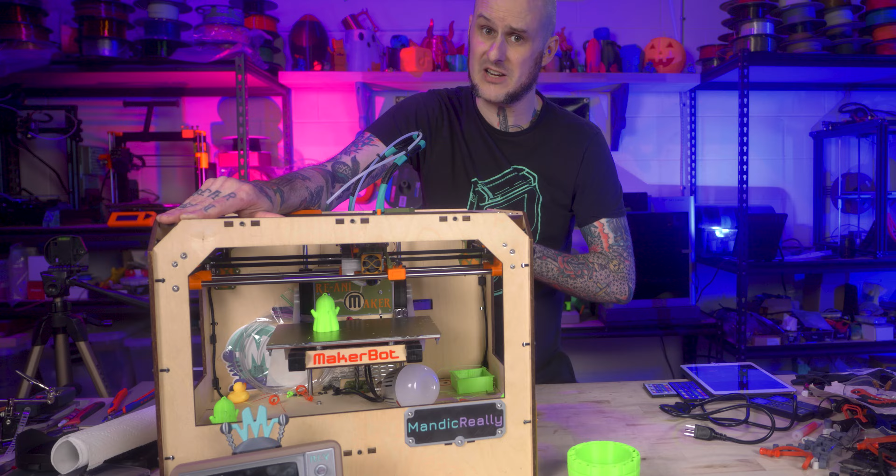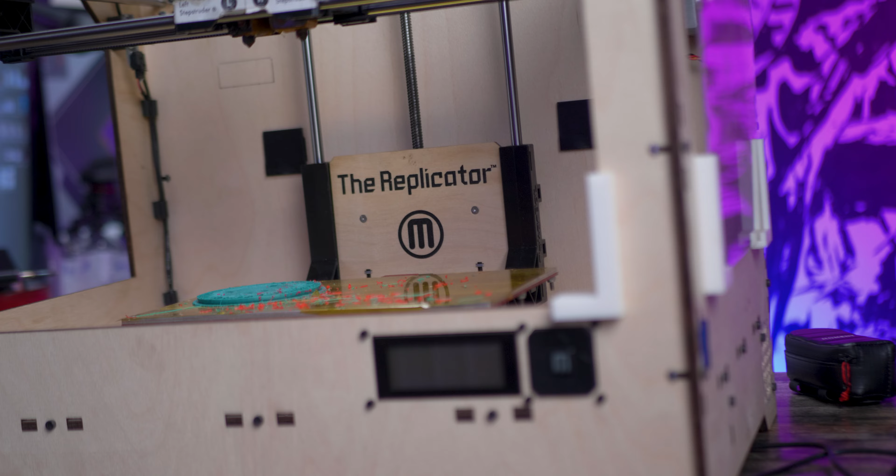For anybody who's unfamiliar, this original MakerBot Replicator came as a kit that cost about $2,000 US, and yes, the wooden frame is how it came. This particular one was a dual extrusion model with 2 extruders mounted on the carriage that I picked up off of Facebook some years ago.

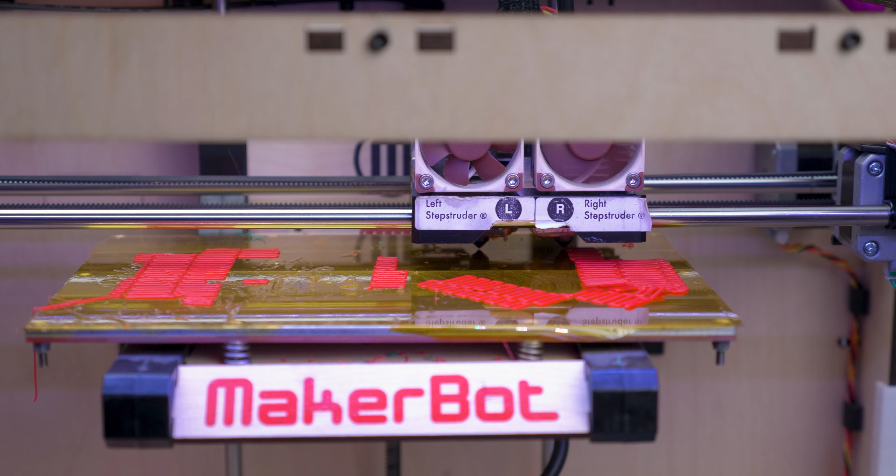Got terrible print quality out of it. One of the extruders wasn't acting properly, it had some shorted wires, and I put it on the shelf and never really did much with it until it came time to build this.

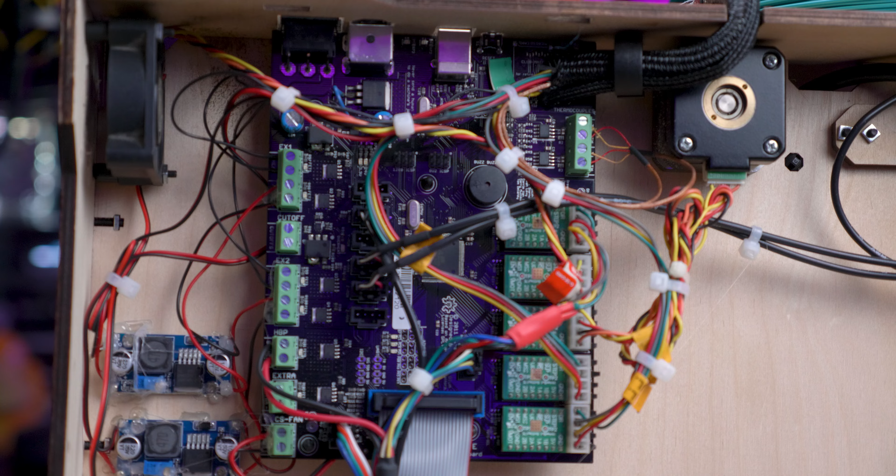My original intention for this machine was to upgrade the mainboard, install an E3D V6 and some part cooling that I designed for it myself, and make it my fastest 3D printer. At the time, I only owned a couple of Ender 3s and my Ender 5 Plus, so calling it the fastest 3D printer I had would not have been a very high bar to clear.

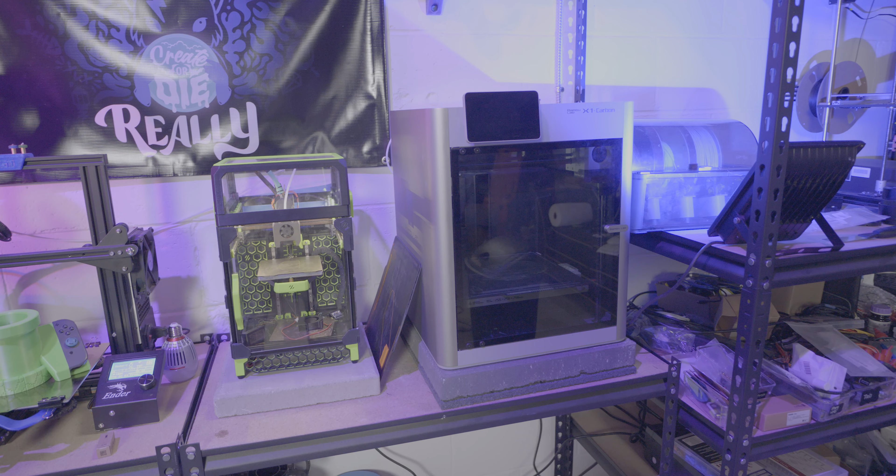With the experience I have from newer and faster machines, and all the builds I've done since I picked this thing up, it had to change and it had to be something different. So let's break down the parts that are at play here, and then we'll talk about the actual design intricacies of this machine.

Let's start off with the thing I mentioned in the intro skit, the Drop Effect XG Extreme Gradient Hotend. Quick note, this is not a review of the XG, and it is not sponsored by Drop Effect. They did send me this hotend pre-release. I had a machine it was going to fit in really nicely, so I used it, and I think it's neat, so let's discuss it.

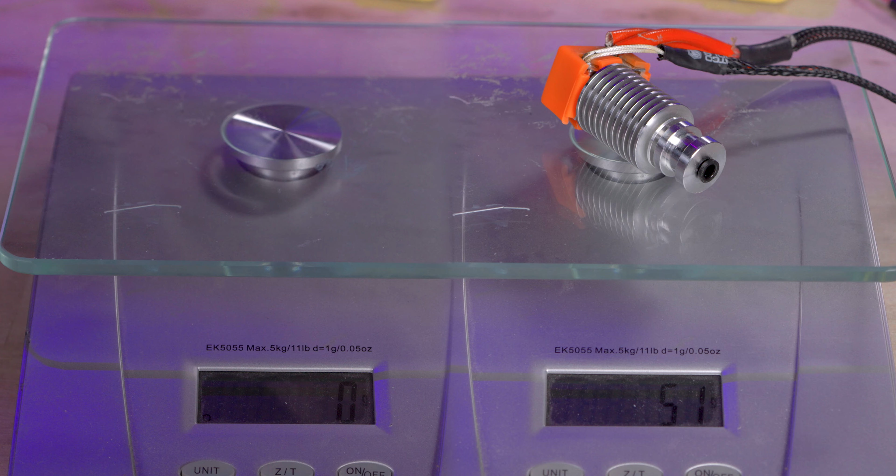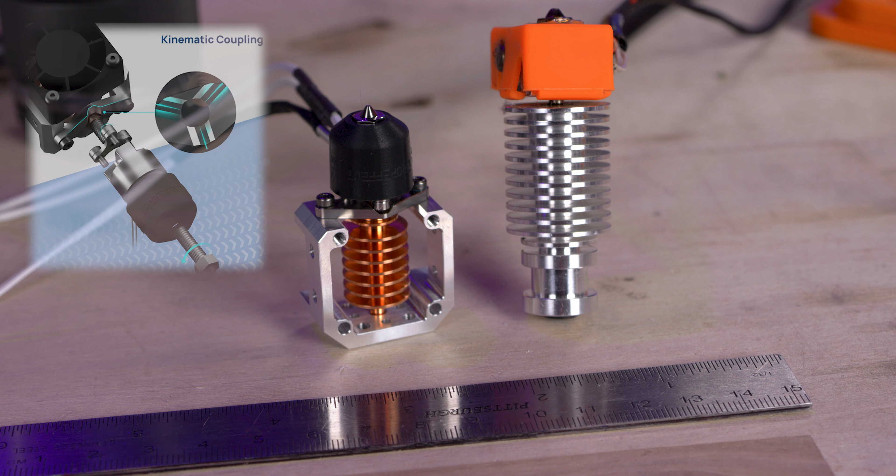This thing weighs in at 40 grams, which is about 10 grams lighter than the E3D V6 I intended to use in this build previously. It has a large copper heatsink, and what they're calling a kinematic mounting system for the hotend heat break setup. It basically decouples the heater cartridge from the frame and allows for expansion and contraction while still really solidly holding the hotend in place.

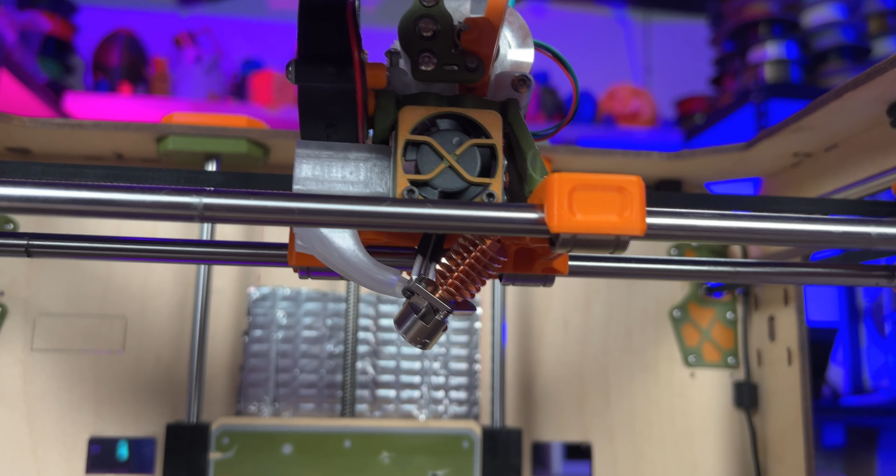I found this had a bit of a side benefit the way it's designed, in that I was able to remove just 2 screws and remove the heatsink, heater core, and heat break from the frame without having to disassemble anything else about my printer. I was able to dangle those down and clear out a clog, having really good access to these parts.

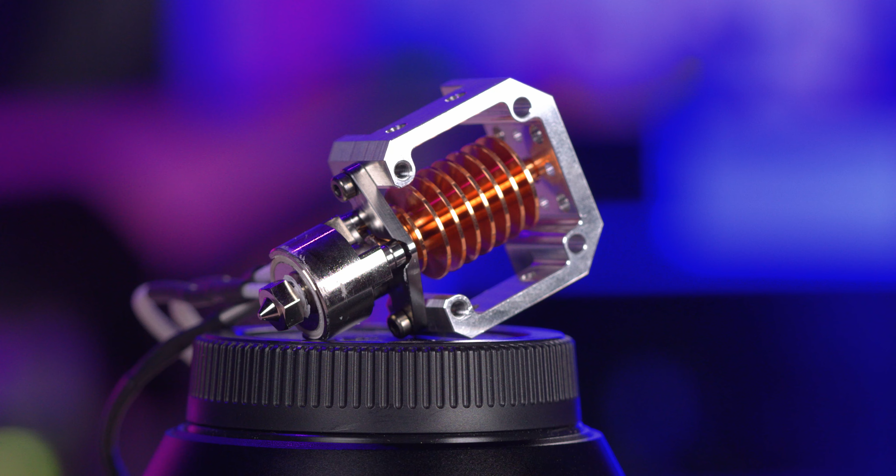The heater element on this is an all-encompassing design that surrounds the nozzle, similar to, say, a Phaetus Rapido or an E3D Revo hotend. Unlike those other units, this does have a serviceable thermistor, so if it burned out you wouldn't have to replace the entire heater core. If you want to swap from the one it came with to something like a PT1000, you could do that here.

The one thing I can say that I understand but don't love here is the nozzles. They are an M4 threaded nozzle, meaning they are a smaller diameter than your standard RepRap nozzle, and to my knowledge they are only currently available from Drop Effect. The reason for this is the smaller diameter means the heater element is closer to the filament path, to transfer heat more rapidly and more efficiently.

This should lead to higher flow, and along with that, it also has a mid-length nozzle. It's longer than a standard RepRap V6 type nozzle, but shorter than a current Volcano type nozzle, so it can still fit into this compact package. One thing I can say about the way all this design comes together is the serviceability. Like I mentioned, dropping out that entire assembly makes it easy to get in there and work on it, or do one-handed nozzle changes.

A lot of hotends claim to be one-handed change, but honestly I find you still want to hold them with a wrench or something because they just don't feel quite that stable. This truly feels rock solid stable. I had zero issue changing nozzles on this one-handed. The only other thing I can say that with is the E3D Revo, which is designed with that as its core idea. I feel like I'm sounding a bit too much like an ad at this point, but I'm impressed by my initial impressions of this hotend. That's the best thing I can really say for it.

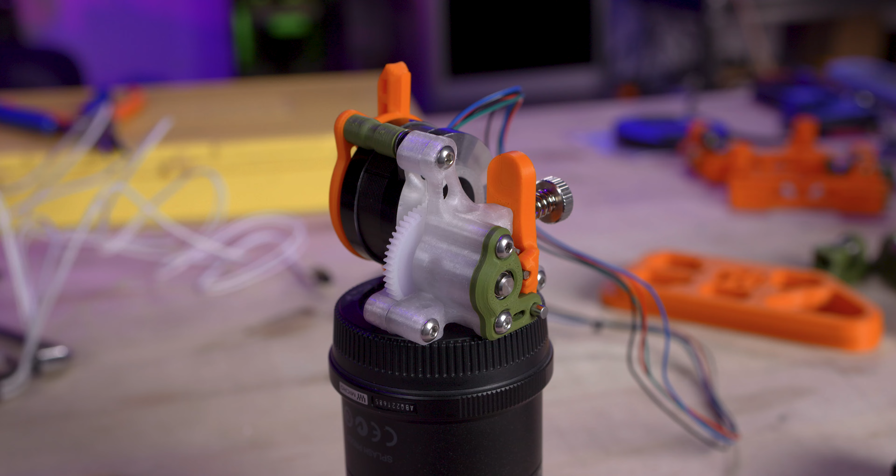Now let's move on to talking about the rest of the hardware in use here, such as the extruder I used, an Annex Engineering Sherpa Micro. This is a 3D printable housing extruder that uses Bondtech BMG gears. It's a very light, compact assembly, which fit the overall build I was going for here really well. This runs a little Pancake NEMA 14 17mm stepper motor on it. I'm running a Fysetc motor right now.

Now these are known to run hot, so I used polycarbonate for the main frame and ASA for some accent pieces on this extruder. And I took inspiration from the Voron V0, as I did in many places on this build, for this cable management piece on the backside of the motor of the extruder assembly.

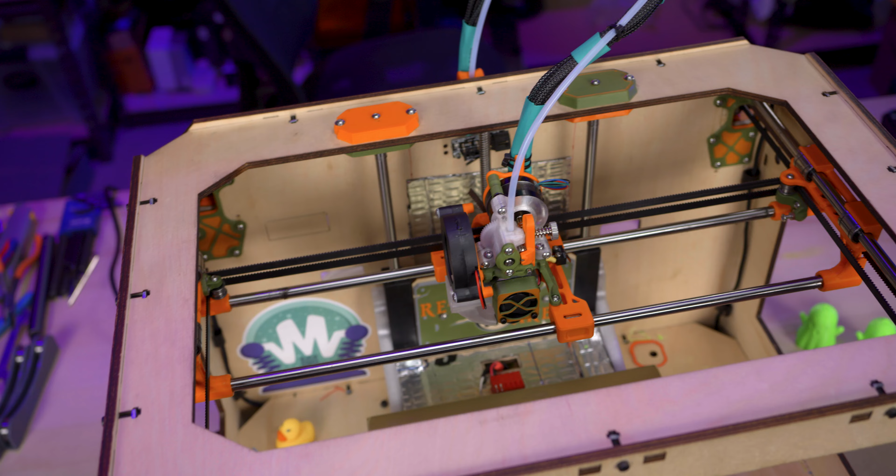For the motion system, the hardware kit, and the belts for this setup, I ordered Voron V0 parts for a Voron V0 build. So I used those pulleys as part of my design elements and the dimensions of the belts from a Voron V0 as well, though obviously not all of the geometry or anything, because it's a totally different machine.

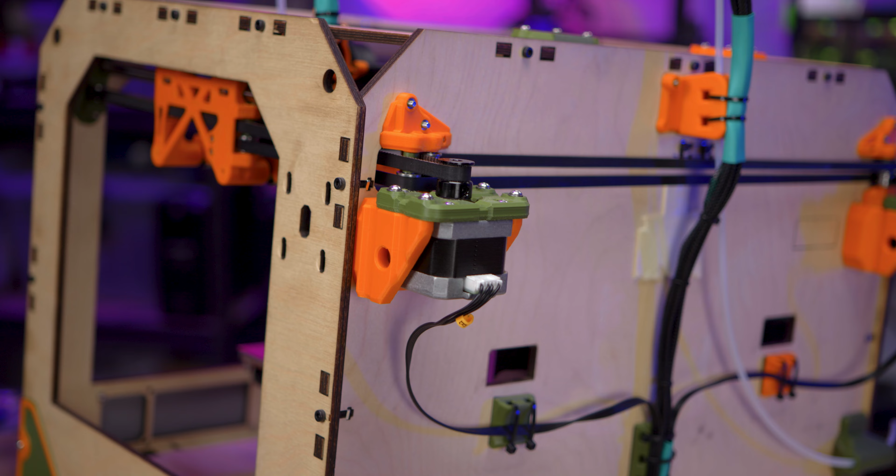The AB, aka X and Y motors, and the Z motor on this build are all the original stepper motors from the original MakerBot Replicator. They were the X and the Y motor, and the Z motor still is the Z motor. This might have been a mistake, and we'll talk about the things I think I want to change toward the end of this video. And I actually robbed a Voron V0 anti-backlash nut out of a kit I have here in the studio. That's a whole other video coming real soon too.

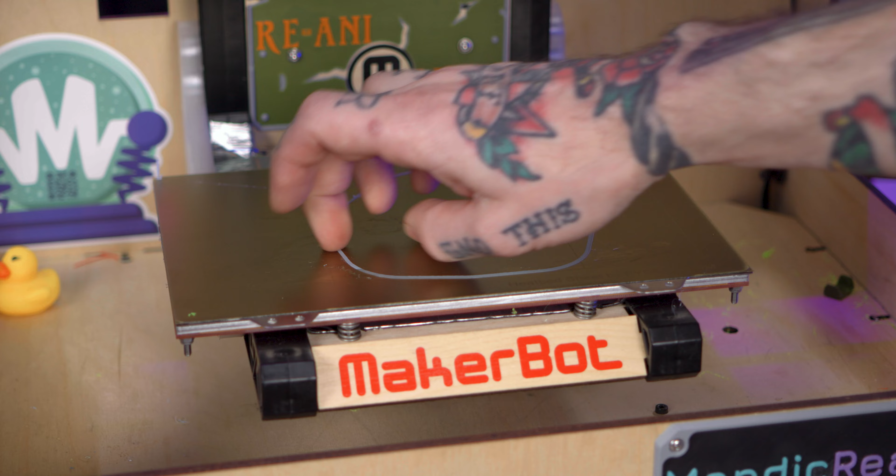The bed assembly is also original to the MakerBot, except I bypassed the thermocouple it would have had on the bed rather than trying to figure out the wiring. I went the Prusa method and just taped an NTC100K to the bottom of it.

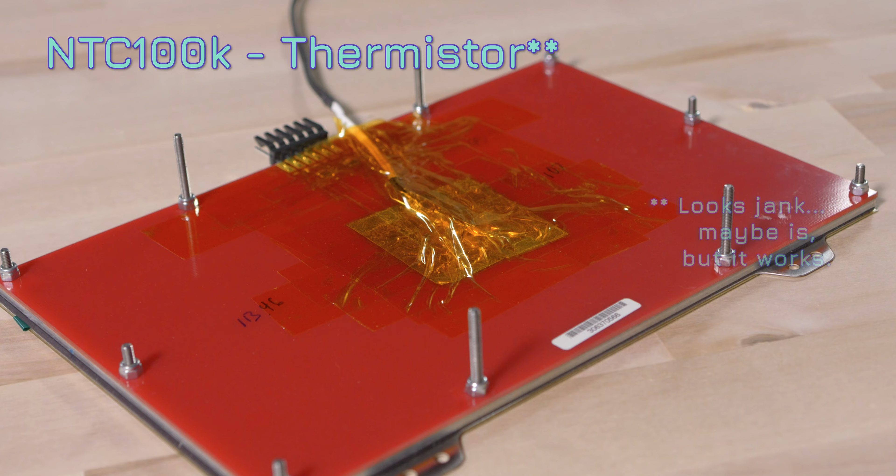And that being a 24-volt wired bed, let's talk about the electronics in this thing. The main board I'm running is a Big Tree Tech SKR3EZ board. It has those weird slot-in TMC 2209 stepper drivers that I'm running.

I chose this board because I had two of them, and also I was worried I was going to end up with these older motors running a lot of motor current, and I knew this board would be capable of handling that type of current output versus some of the other ones I had available to me.

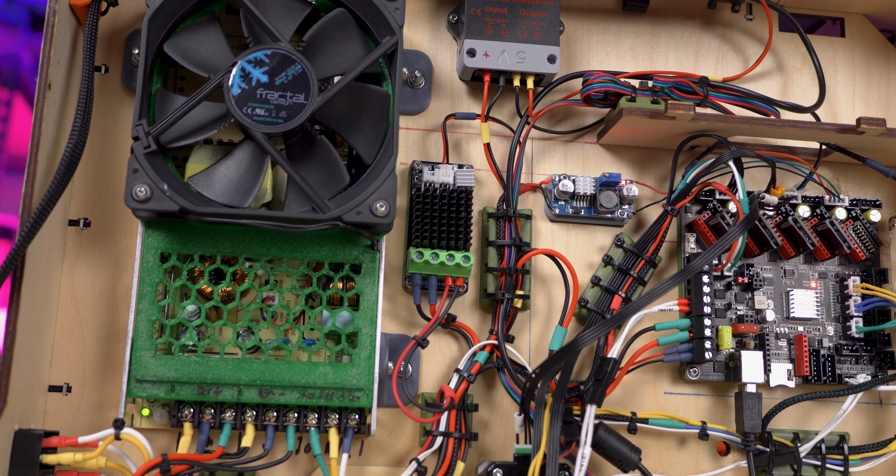However, I did decide to forego using the onboard MOSFET for the bed heater. For that, I went to an external MOSFET. The reason I did this is because I'm using the original MakerBot Replicator bed, and I have no idea what power draw that bed has new, and if there's any degradation of it, there's a potential it could draw more power, and I really didn't want to burn out the MOSFET on the board. I'd rather use the external one and risk that versus my main board.

For power supplies, we have two of them in here. We have the Meanwell 350 watt that is supplying the 24 volt to this system. The other power setup is a 24 volt to 5 volt converter that I'm running to power the Raspberry Pi that has Klipper running on it.

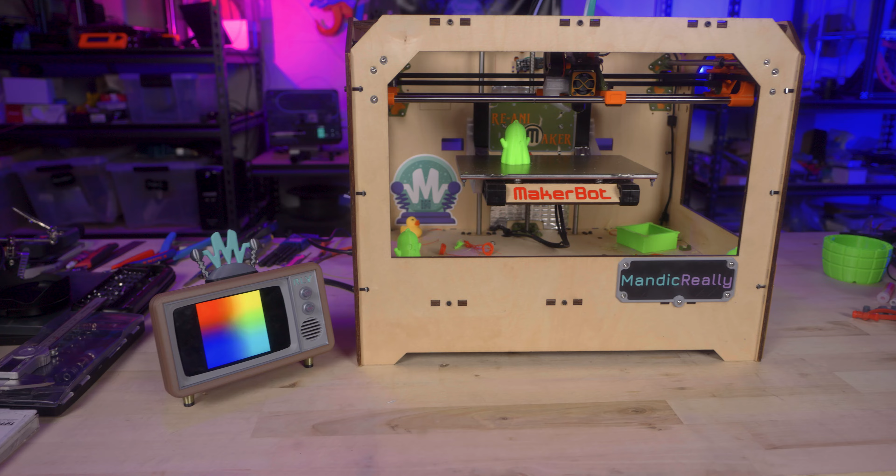But the astute among you might have noticed I mentioned Raspberry Pi. Where is it? Well, it lives in this cute little tube television. Fairly early on, I came up with the name Project ReAniMaker based off of the Reanimator movie, and as such, I wanted to have a bit of a B-movie, kitschy feel to certain things, such as the army green and orange color scheme of the printed parts. The wooden box frame design kind of just screamed it to me, and so I designed up this little tube TV Pi case that has a Big Tree Tech Pi TFT 50 touchscreen inside of it, and mounted to the backside of that is a Pi 3 Model B. Taking a closer look at this thing, there's a lot of design elements in this little thing.

It's got my RLY instead of an RCA logo on the front, a couple of tuner knobs that don't do anything, and a rabbit ear antenna on top that's one of my MandicReally logos. There are various vents around this thing - one on the faceplate, one in the side panel, and a couple in the back panel, all to keep ventilation and airflow moving.

The back panel is removable for easy access to the Pi, but it also has a 40mm 5-volt fan inside to keep the Pi cool and flow air through it.

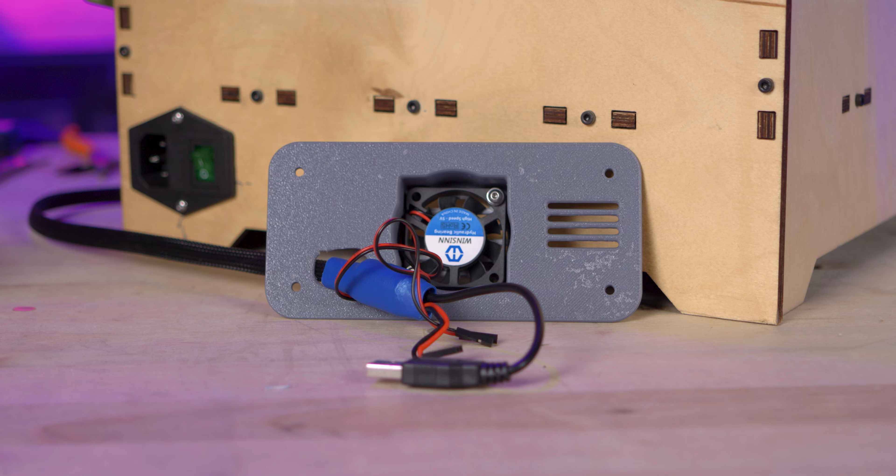I'm absolutely going to release the files for this case because I could see people using this as just a fun little Pi computer setup. Use this screen with a Pi mounted inside, hook up a mouse and keyboard, and you've got a kitschy, fun little display computer.

Because the original MakerBot Replicator was still an open source project, I was able to get the original SolidWorks assembly CAD files that I could open up in Fusion 360 and build off of. If I had to measure and make everything from scratch, it would have been too time intensive, because it was already extremely time intensive to do this.

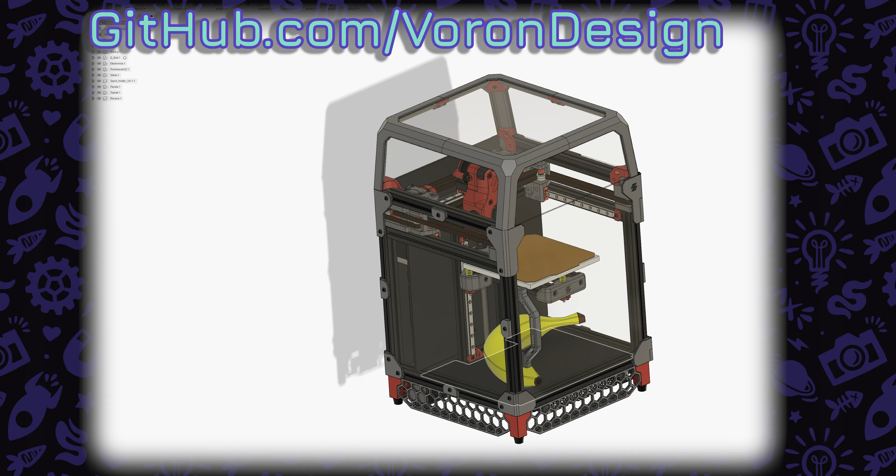The other star of this process was the Voron design team. The Voron V0 file that I had loaded up in Fusion 360 allowed me to reference quickly if this belt should be turning this way, that way, which one should be crossing how. Anytime I got a little turned around and confused, I was able to refer to that and at least get some bearing as to where I was heading.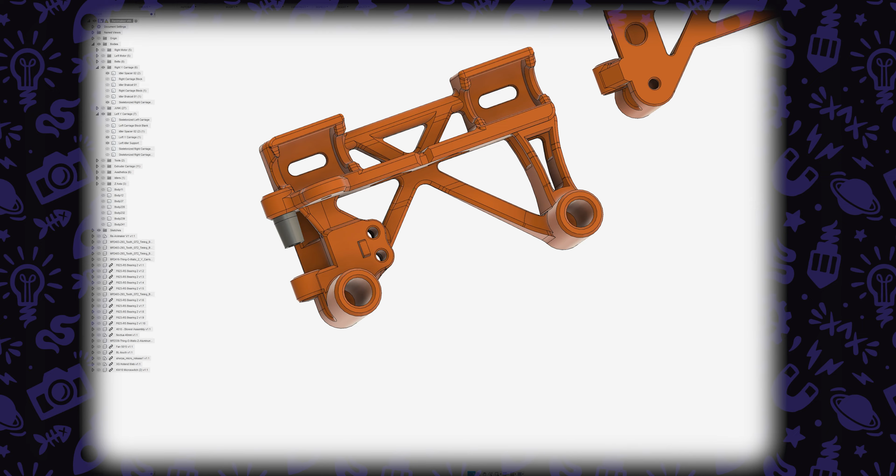The MakerBot Replicator uses 8mm rods and linear bearings to make up the motion system on it. So I started my design process with the Y carriage end pieces, because they had to include the bearings on the top and encompass the rods on the bottom. If I could get the fit right on the rods and the bearings with my printed parts, I knew the project was viable.

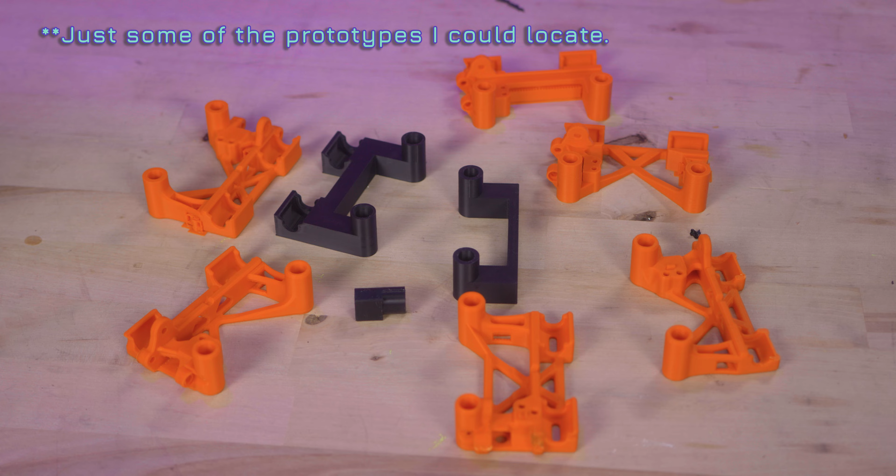I got to work iterating, designing, printing out parts over and over again - just printing the parts that had to fit onto the rods, printing the parts that had to clip onto the bearings. I printed them in the Polymaker ASA that I knew I was going to be using for my final parts, so shrinkage was factored in, and the machines I was actually printing on, their tolerances were factored into my design.

Once I had the very rough mock-up ones that were nothing like I knew the end pieces were going to be, I just needed to ensure I could get this carriage moving. I was able to move forward with belting and that entire process. And that was a process.

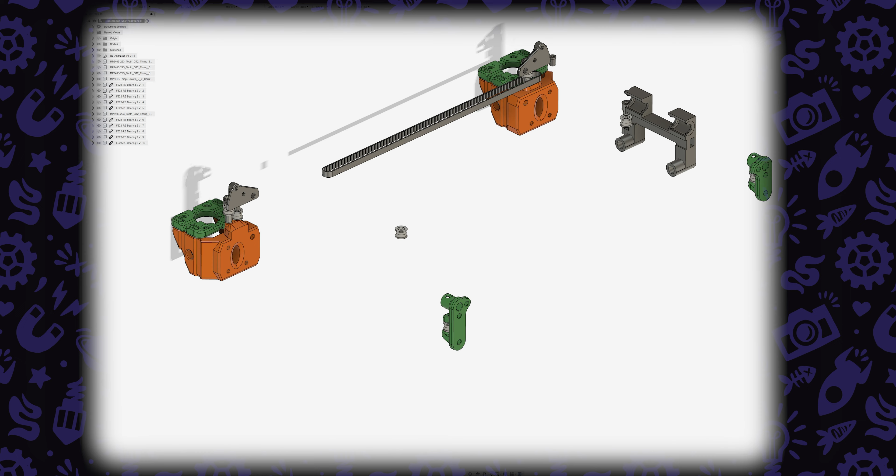I literally made clones of the belts from the machine and just oriented them, turned them, placed them where I knew they would need to be for a Core XY system to function.

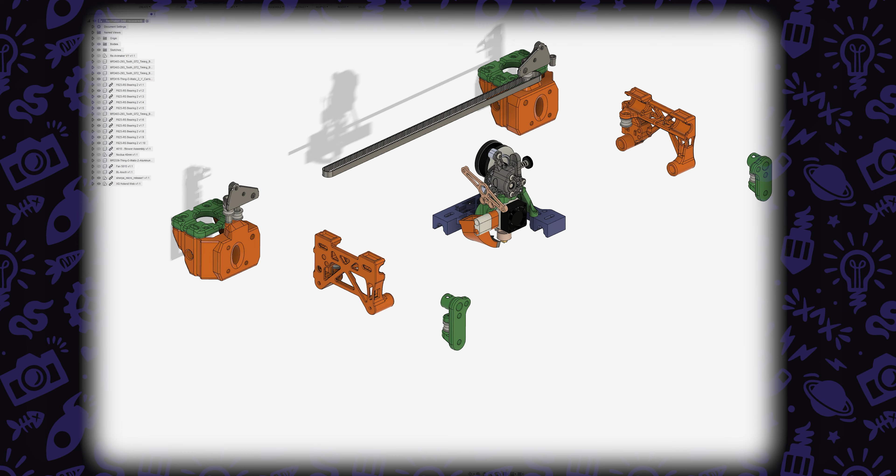Honestly, the way the design process went and usually goes is place an object where you think it needs to be or where you know it needs to be, and then connect A to B. Draw lines in between them, create objects - which honestly, I should really be doing Fusion 360 tutorials at this point. Maybe my ways aren't the best ways, but they work pretty darn well for me.

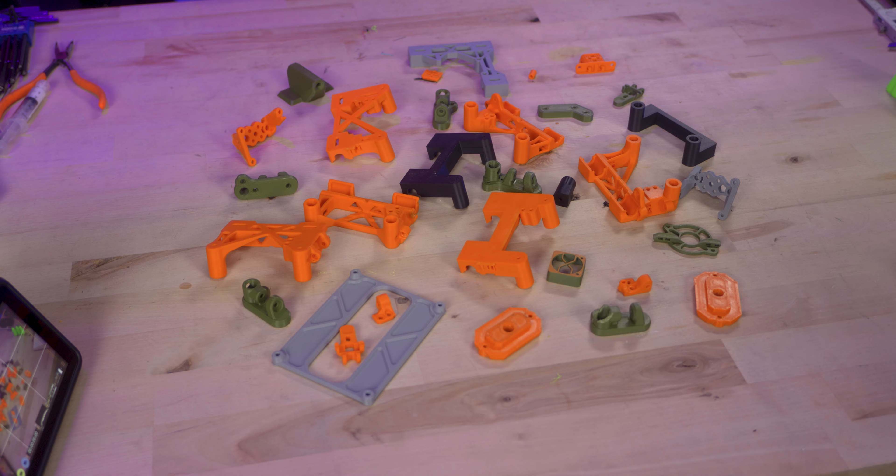And in this case, it was also a lot of prototypes. These were just the ones I was able to quickly find. We recently did a studio cleanup, and I think a bunch of the other ones ended up in a box somewhere.

That's kind of what it has to come down to. It all looks good on paper until you actually print it out and realize, oh, I can't install a screw the way I thought I could, or heat set insert, or the rod doesn't fit quite right despite the tolerances working previously fine. My favorite little factoid about this build is the X carriage itself.

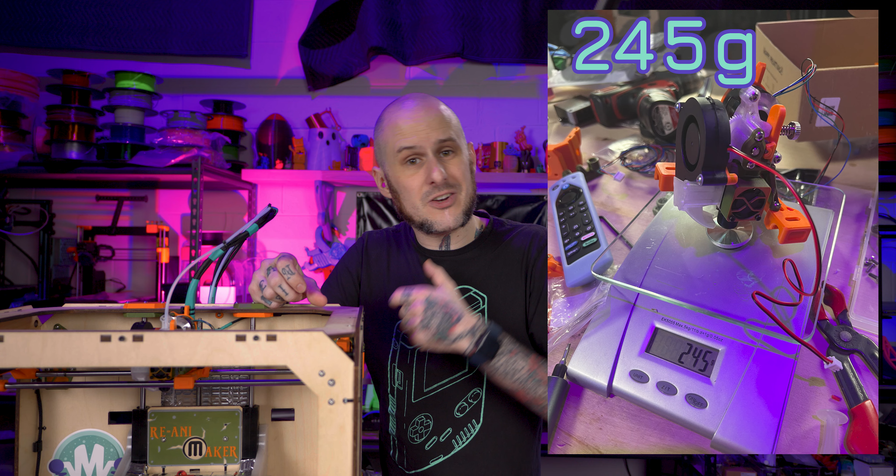The carriage, the hot end mount, the hot end extruder, fans, part cooling duct, all of that stuff assembled, sitting on the scale, weighs in just 3 grams more than one of the original extruder motors off of this MakerBot Replicator. And remember, this was dual extrusion, so there were 2 of those motors, there were fans, there was more going on there. So I'm likely somewhere around 30 to 40% the original weight on the tool carriage for this machine.

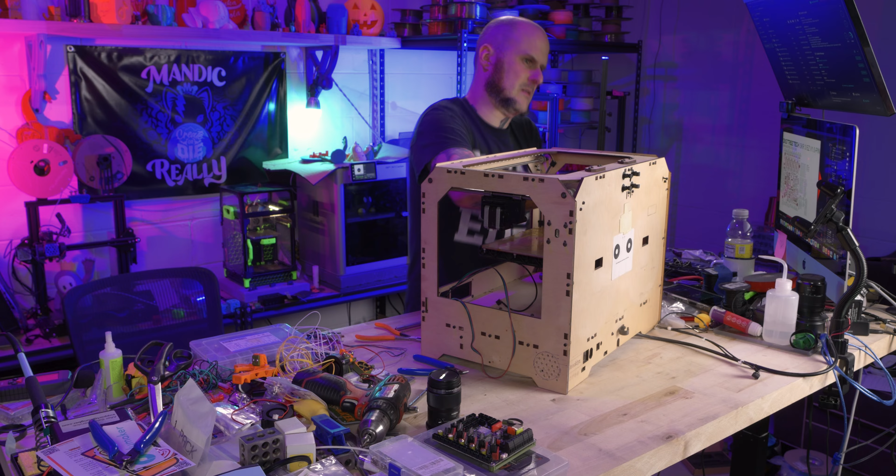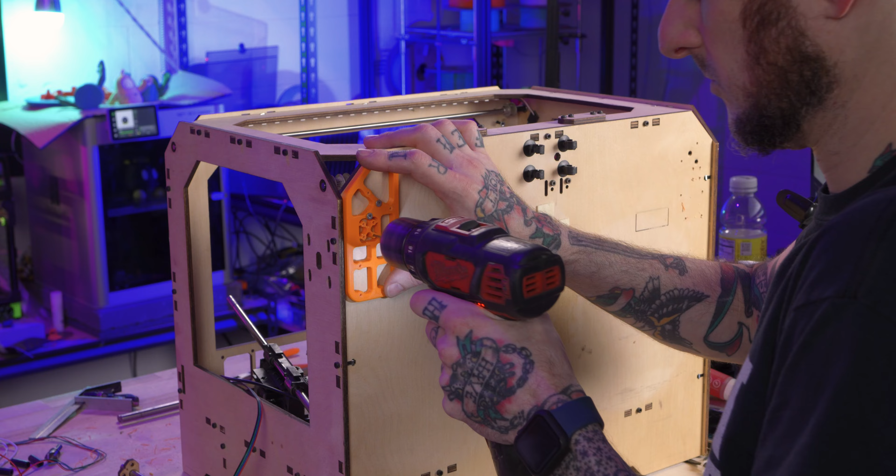On such an ambitious project, I was never going to get away without modifying the case of the replicator. As such, I created a couple of drill jigs that I was able to bolt onto existing holes on the body to line up exactly where I needed to drill for new mounting holes for mounts and holes to pass the belts through to get to the motors in the back of the body. It was the simplest way I could see to do it and get it accurate, and it worked out really well in practice.

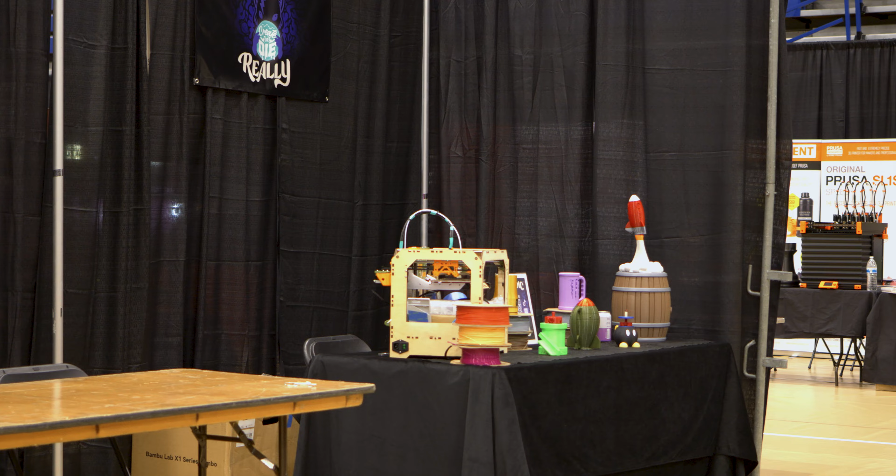I need to share how getting this thing to ERRF went. The night before I needed to head to the show for load-in, I was up until 4 a.m. getting this thing moving under its own power. Not printing, just moving. I didn't get this machine printing until midnight in my hotel room the night before ERRF opened. I already set up my table at the show floor and went back to my hotel room with this machine, got it printing.

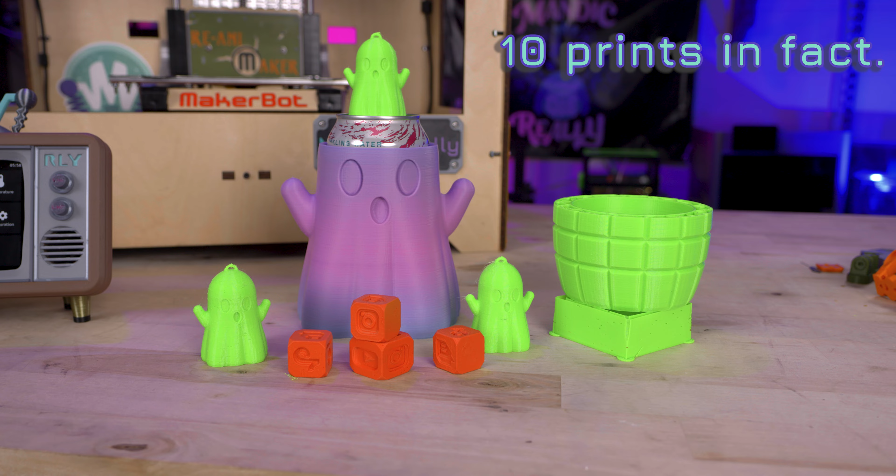And the very first print I did was a short, fat calibration cube that was 25 millimeters on X and Y and 20 millimeters on Z. Now I can count the number of things I have printed on this machine so far as of filming this video on both hands. And the print quality is not amazing. It's not terrible by any means, but it's not nearly as good as I would like to see.

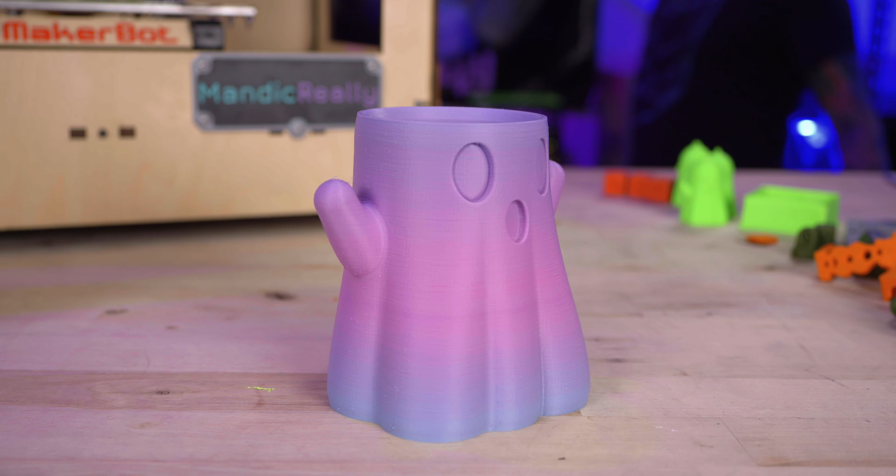The most recent print I did on it is also the largest print I've done so far, and that's my ghosty can cup design using this CookieCad unicorn filament. This thing turned out overall really pretty good. It has some salmon skin type look to the outside of it, and I think I know what that's down to.

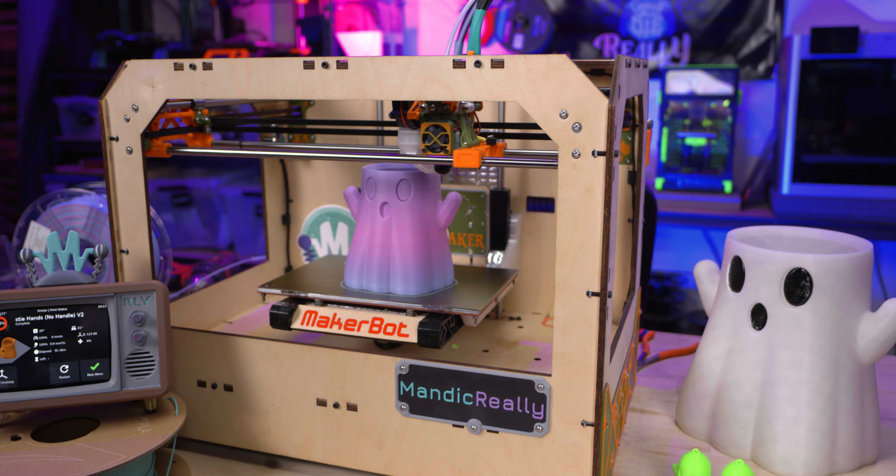You see, despite the fact that on the Y carriages my linear bearing mount was solid and tight, for some reason on the X carriage they're loose, so I can actually wiggle that on the bearings just a little bit, but enough to, as it's slinging back and forth, likely introduce inconsistencies. That's my best guess on what's happening, and I intend to update the X carriage to fit these just a little bit better. But mind you, that ghosty printed in 5.5 hours.

I used a Voron V0 profile in Prusa Slicer, modified the bed dimensions, and a couple of little tweaks here and there in the settings to match Project ReAniMaker, and it's just been printing like that. It's been running Voron speeds and accelerations with little to no tuning so far. Realistically, the only things I've truly tuned on this machine so far is the E-steps in Klipper, its rotation distance. I've dialed that in on this machine, and I've dialed in the pressure advance, which is their version of linear advance, so my extrusions are a little more consistent at the ends of layers and around corners.

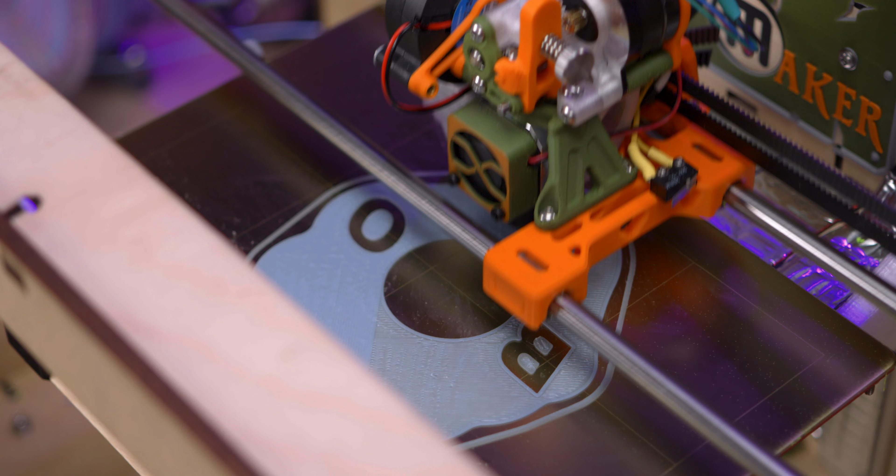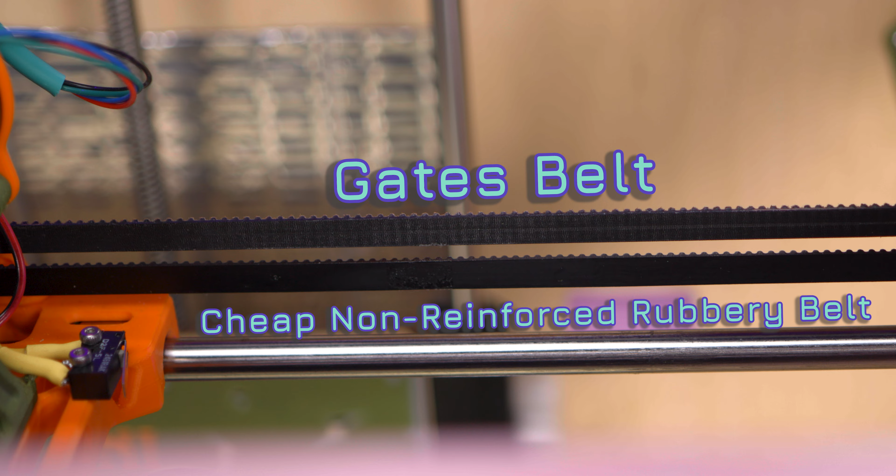But here's where I need to talk about the things I would do differently. Realistically, not a whole lot. I mentioned that X carriage needs the fitment adjustment on it. That's not a big deal. I probably have a few minor fitment tweaks on printed parts like that. The belts are mismatched in this. I have one Gates belt and one super cheap Amazon rubbery belt that's terrible and makes this awful noise.

I think the biggest thing I need to address in this build is the motors. The Z-axis is probably all right, that anti-backlash nut on the lead screw seems to have taken up all the slop, so that's fine. I found while printing on the show floor at ERRF that the X and Y motors were cooking on this machine. I used 0.8 amps as my baseline for the motor current, which I found through multiple sources as the amperage these motors should run at, supposedly, from back in the day. I'm assuming maybe with their age or the speeds they were being pushed to, they had never seen that kind of action before.

They just were not happy about it. Now I'm actually down at 0.5 amps with them. I'm not skipping steps that I can tell, but I'm worried that maybe I'm skipping micro steps or something. It's causing some of my print inconsistencies along with the slop and the belt issue.

Where I am skipping steps is the extruder motor. Fysetc clearly states to run this motor at 0.35 amp. I ended up bumping all the way up to 0.425 amp just to be able to extrude at 10 millimeters cubed per second, which I think this hot end is probably capable of 20 millimeters, if not more. So I need a stronger motor on that. I've already ordered some new LDO 0.9 degree motors for the A and B motors on this assembly. I haven't ordered the extruder motor yet — I think I'm going to push this one till it burns up, honestly, see what happens.

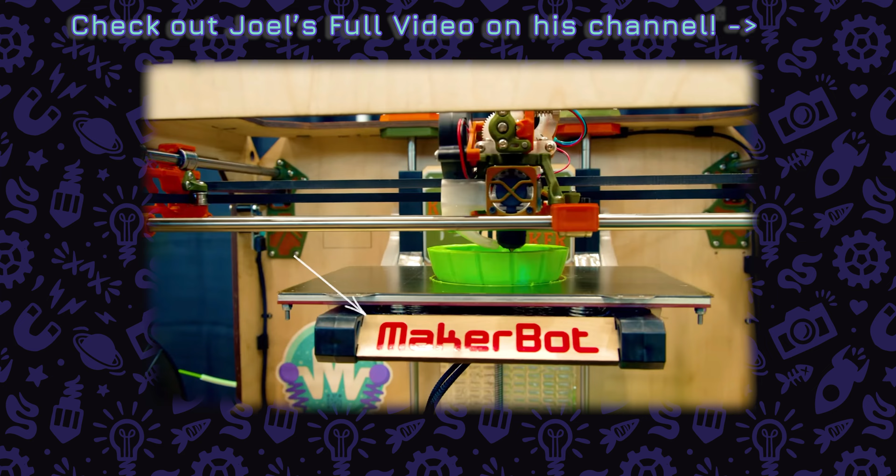As I said in the little feature video that 3D Printing Nerd Joel Telling did on this project, I could have brought a Voron, but I knew it'd be a dime a dozen. I brought a wooden box that prints like a Voron instead.

There are absolutely improvements to the print quality and speed and so many things I can adjust and change on this machine, but I'm seeing the potential there. I'm really happy that I took this thing from a shelf ornament collecting dust to a functional printer that I think I can actually see myself using on a regular basis now.

And those are the broad strokes of Project ReAniMaker. I'll likely do a vlog or something when I get around to installing the new motors and belts and tune this thing a little more. Maybe I'll do a little thing where we sit down and do some print quality tests with the updates I intend to make, when I find the time. I have plenty more projects and video ideas on the list to get done in the near future — a couple more printer builds, some other related 3D printing build stuff, some maker content, and upgrades to the studio, all coming to the channel soon.